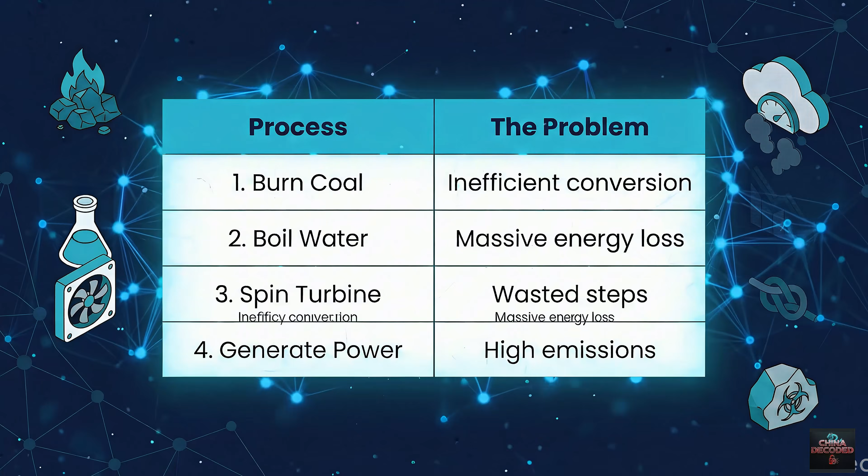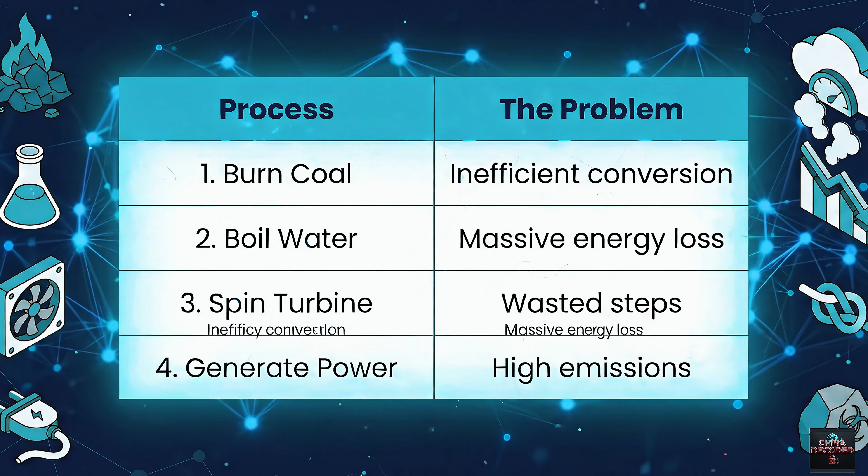And the problem with a normal coal plant isn't just the smoke, it's the fire itself. The entire process of burning something to make electricity is just fundamentally wasteful. Just look at how many brute force steps there are in the old way of doing things. You start with the chemical energy that's locked inside the coal. You burn it to make heat. You use all that heat to boil insane amounts of water into steam. That steam then has to spin a giant heavy turbine. And only then, after all of that, does the spinning generate electricity. Every single step in that chain just bleeds energy.

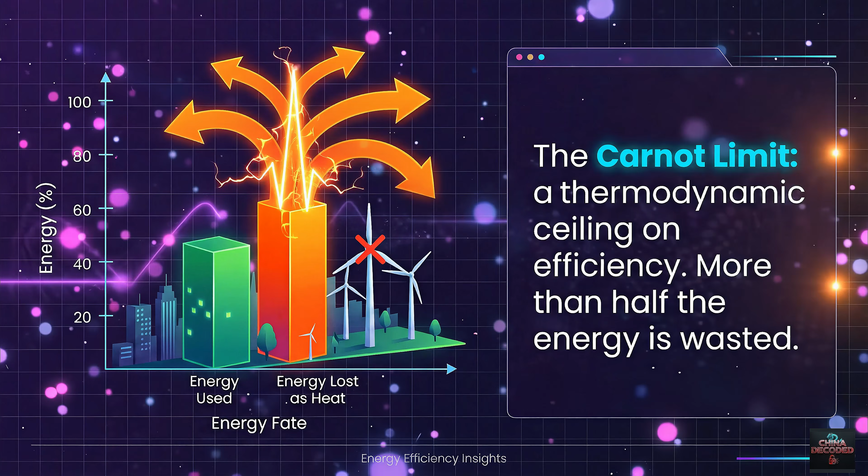It's so inefficient. And this isn't just a small flaw. It's a fundamental law of physics. It's called the Carnot limit. And because these old plants are basically just giant heat engines, they have a hard ceiling on how efficient they can ever be. This chart says it all. Even the best, most modern power plants on Earth lose up to 60% of the coal's energy as waste heat. Just gone, vented into the air. We're throwing away more than half the energy before we even use it.

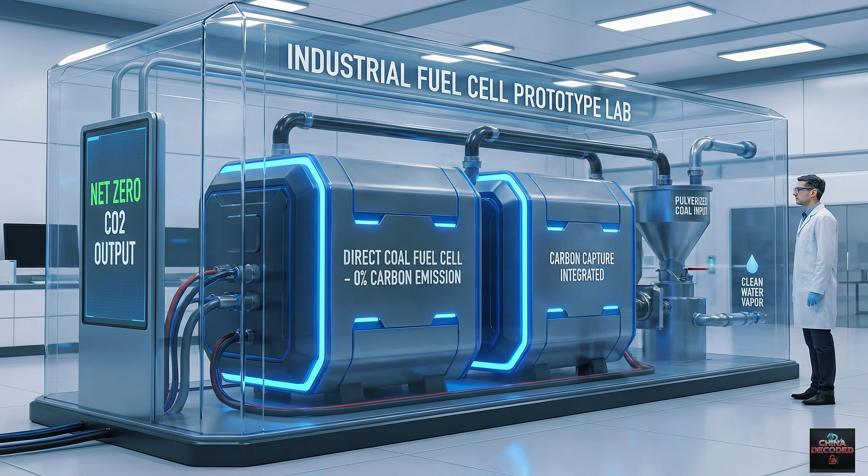So how do you beat a fundamental law of physics? Well, you don't. You change the game completely. You build something that isn't a heat engine at all. And that's where this comes in. The zero carbon emission direct coal fuel cell, or let's just call it the ZC-DCFC. This isn't just a better power plant, it's a whole new way of making energy.

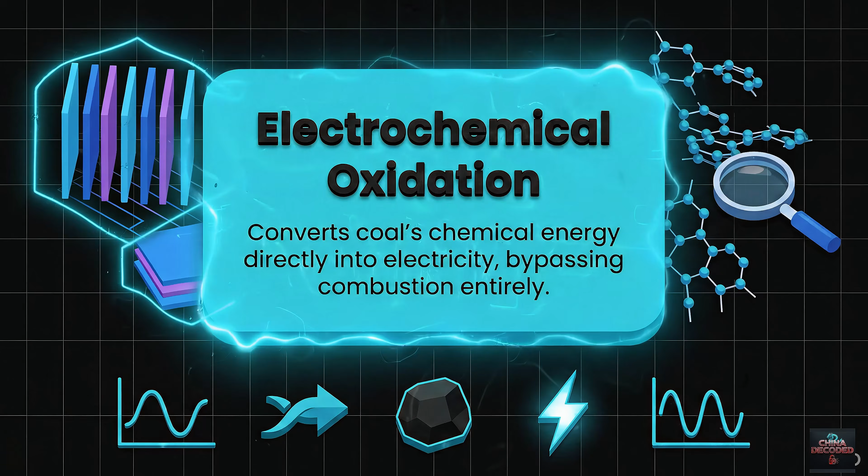The secret here is a process called electrochemical oxidation. See, the team at Shenzhen University, led by academician Xie Heping, they made this incredible mental leap. They just stopped thinking of coal as something you have to burn. Instead, they started treating it like a solid-state electrochemical energy carrier. In other words, they figured out how to use a lump of coal like it's a battery.

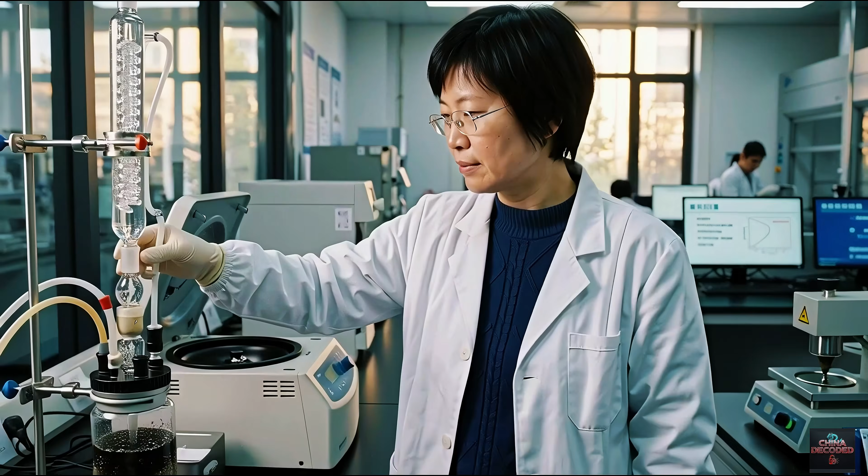Okay, so how does this coal battery actually work? It's incredibly elegant. You've got pulverized coal going into one side, the anode. On the other side is the cathode. And in the middle, there's this special membrane called an electrolyte.

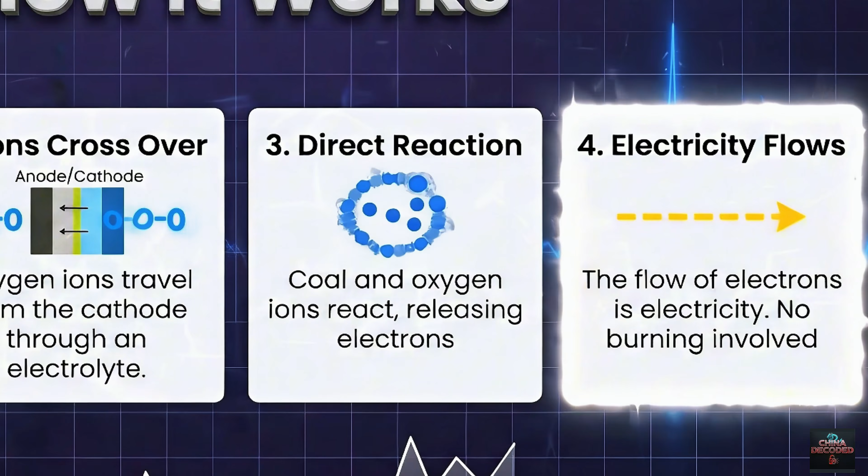Oxygen ions travel across that membrane and react directly with the carbon in the coal. That reaction releases a flow of electrons, and that flow of electrons is electricity. No fire, no steam, no giant spinning turbines—just a quiet, direct conversion of chemistry into power.

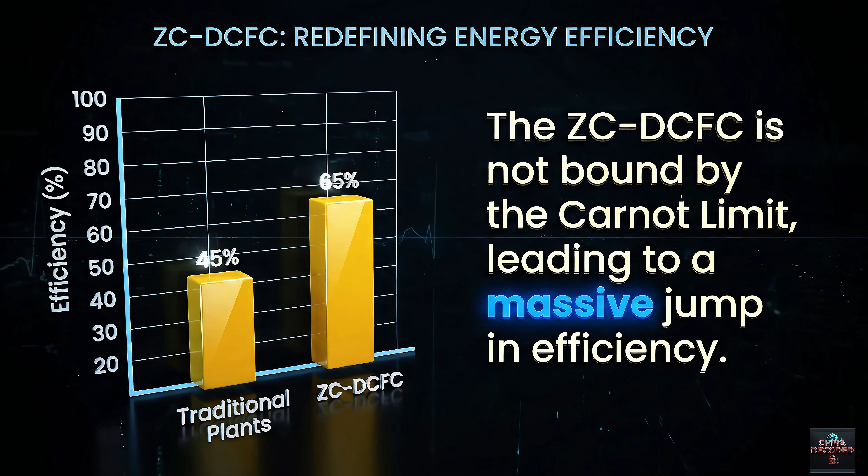Because this thing is not a heat engine, it completely shatters the old Carnot limit. The results are staggering: the best traditional plants in the world max out at maybe 40–45% efficiency, but this new fuel cell is projected to hit 60–65%. That's way more power from the exact same lump of coal, with zero direct emissions from the power generation itself.

But here's where the story gets really wild. The true genius of this technology isn't just the power it creates, it's the waste it eliminates and even turns into something valuable. This is where it goes from being just a power plant to being the core of a circular economy, and this part is truly transformative.

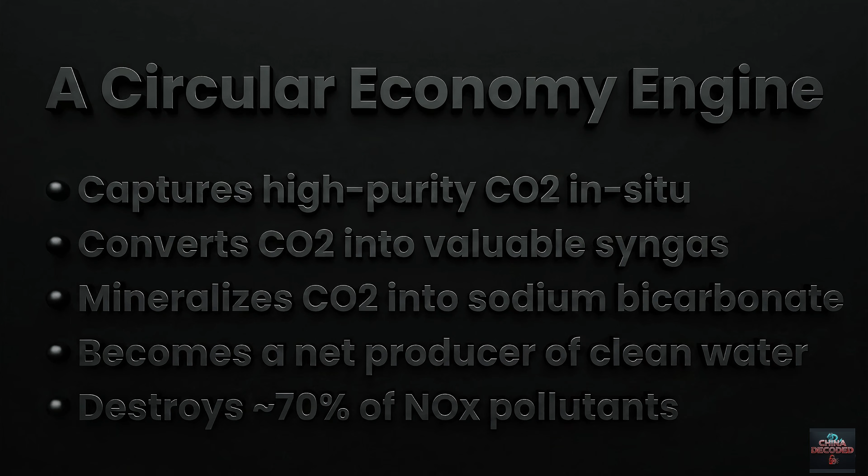Because there's no fire mixing with air, the system naturally captures a pure stream of CO2. But, and this is the kicker, it doesn't just bury it—it can convert that CO2 into valuable stuff, like synthesis gas for chemical plants, or even mineralize it into sodium bicarbonate. Yep, baking soda, locking the carbon away in a useful product. On top of all that, it actually produces clean water and destroys other nasty pollutants like NOx.

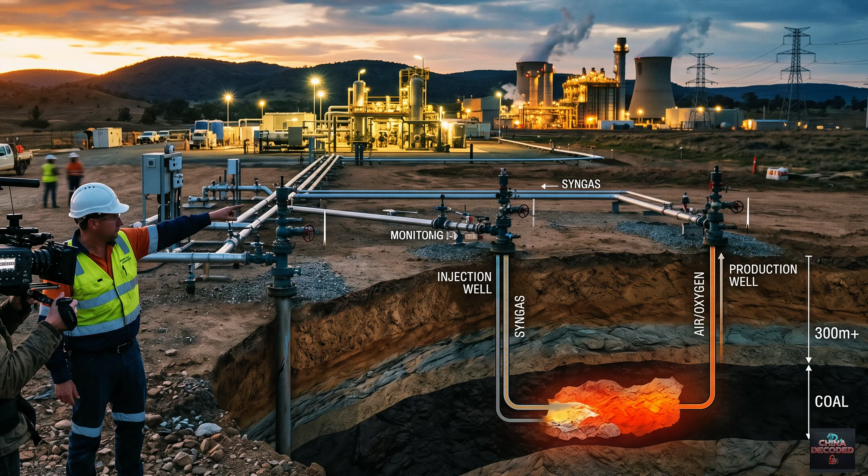Alright, so if you thought that was revolutionary, the next application is where this technology goes full-on science fiction. We're talking about making electricity from coal without ever digging it out of the ground—2 kilometers deep, over a mile. There are literally trillions of tons of coal that deep, way too dangerous and expensive to ever reach with human miners. But the entire game changes if you don't have to send people down there, just the technology.

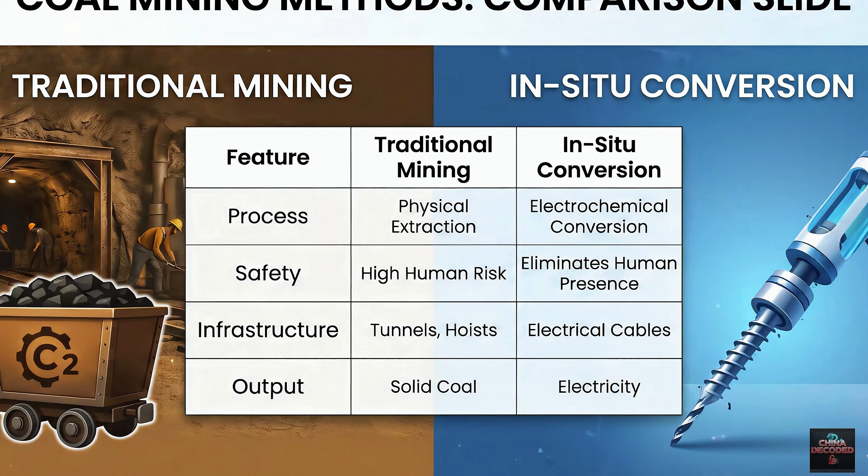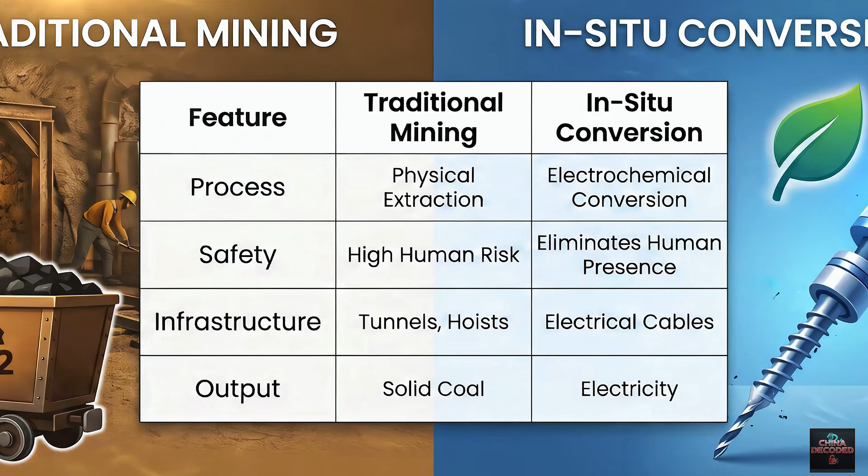This table shows the insane difference. The old way: you dig dangerous tunnels, build giant hoists, run fleets of trains to haul rock and coal to the surface. The new way: the tech converts coal to electricity right there in the ground, and you just send the power up through a cable. It gets rid of the danger to humans, the massive infrastructure, and the carbon footprint of mining itself.

Now, it's important to understand this isn't just some cool lab experiment. It's being developed to be a cornerstone of a new national energy plan, a strategic move to solve some of the country's biggest challenges at once. This tech is designed to solve that classic energy trilemma: first, it creates a real path to hitting ambitious 2060 climate goals; second, it gives you stable, on-demand power that can back up renewables like wind and solar, keeping the grid on 24/7; and third, it guarantees energy security, letting China use its own massive resources cleanly for decades to come.

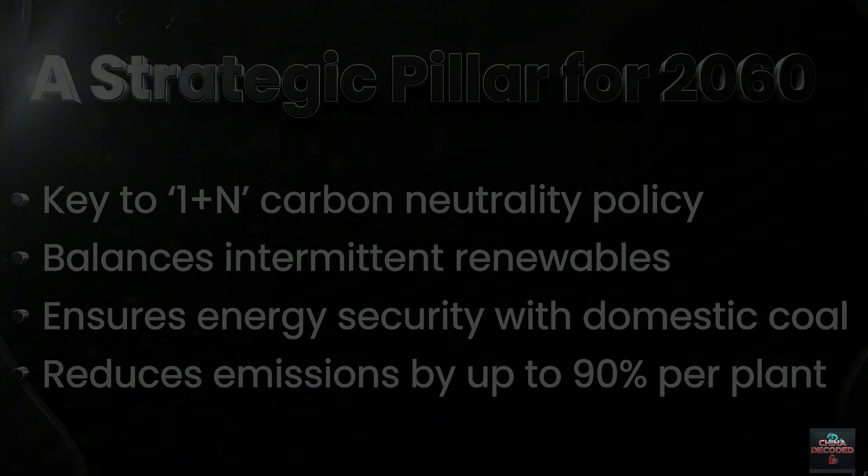And that leaves us with one final massive question. For decades, we've been told the only way to save the climate is to ditch fossil fuels completely. This technology looks that idea straight in the eye and challenges it. So what if the answer isn't abandonment, but reinvention? Could this be a blueprint not just for China, but for the whole world to get to zero carbon without wrecking economies and power grids?

Seriously, what do you think? We really want to know your take. Is this a real game changer, a critical part of the climate puzzle, or are there big risks and problems we haven't even thought of yet? Let us know down in the comments.